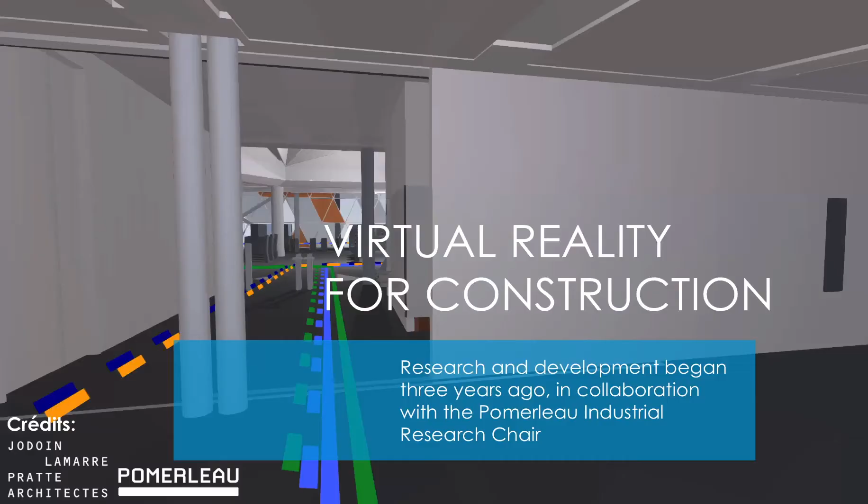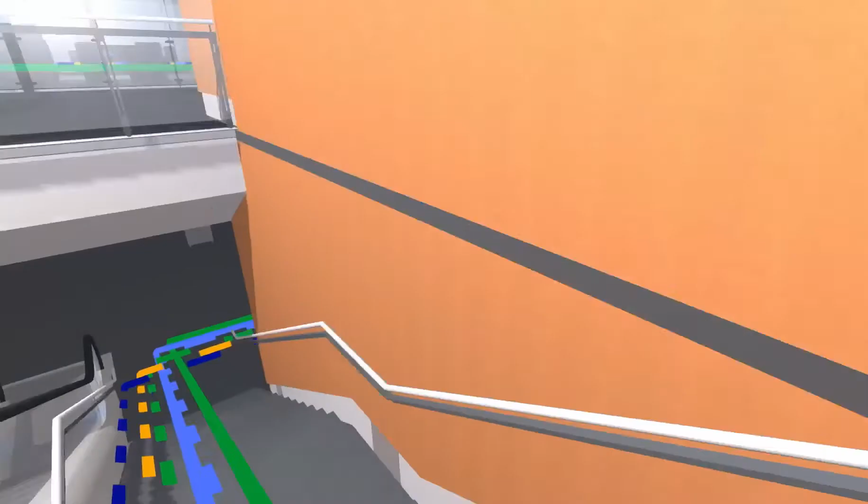There were 3 waves, if you will, of research, and it focused mostly on the use of this technology in the world of construction, so the needs in construction.

At the beginning, the idea was mostly to visualize and interact with the BIM models that we have at hand, while having an excellent graphic quality, and also to immerse ourselves into the project thanks to virtual reality with several different peripheral accessories.

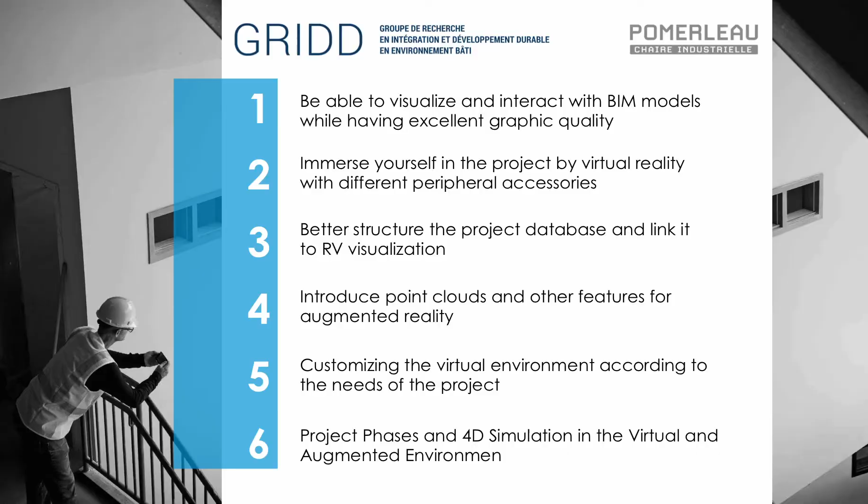In the course of some of our research, we've established that we wanted to better structure, better take into account the database with the visualization of virtual reality. We call upon several technologies.

Not only in virtual reality are we interested, but also point clouds that we want to take into account, and also augmented reality, as well as other functions that we will be speaking to you in a little while.

During the third research wave that Basil was part and parcel of, we sought to personalize the virtual environment according to the needs of the project, because each project is distinct and virtual reality is not applied in the same fashion or to the same degree for each project.

And then visualization of the deadlines, 4D simulation, and augmented virtual reality also comes into play in the pre-construction phase. So Basil is going to be explaining to you our different research axes.

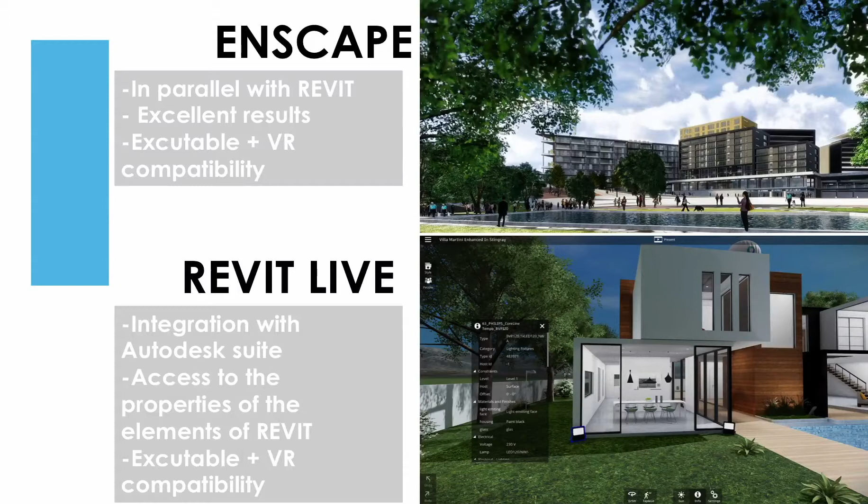For the visualization side of things, we went over the existing software. The four big ones: Enscape allows us to work alongside Revit with very realistic images, very practical, but it's only from a visualization point of view. Autodesk has the same principles, allowing for the same thing. There's also the Revizto tool that adds a collaborative aspect.

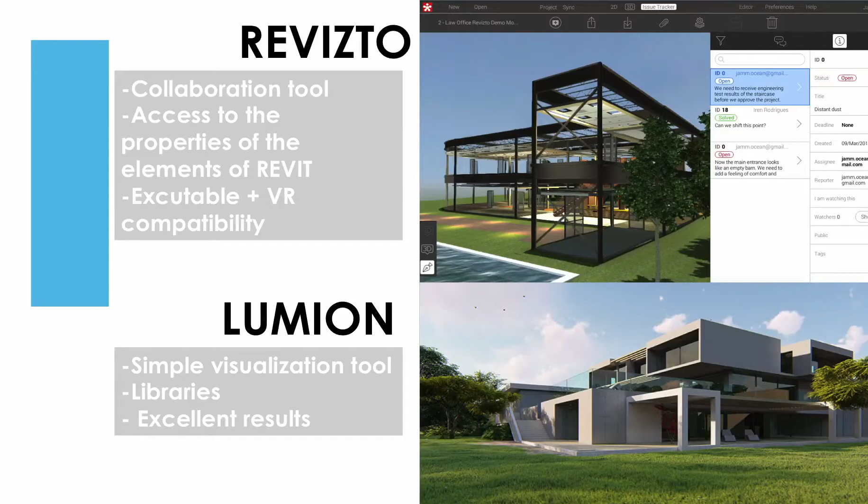Here, the idea is not for things to be only practical. You can add aspects like traffic, equipment, automobiles, trucks, what have you. All of those tools I've mentioned are very practical and perform well, but they're not flexible enough.

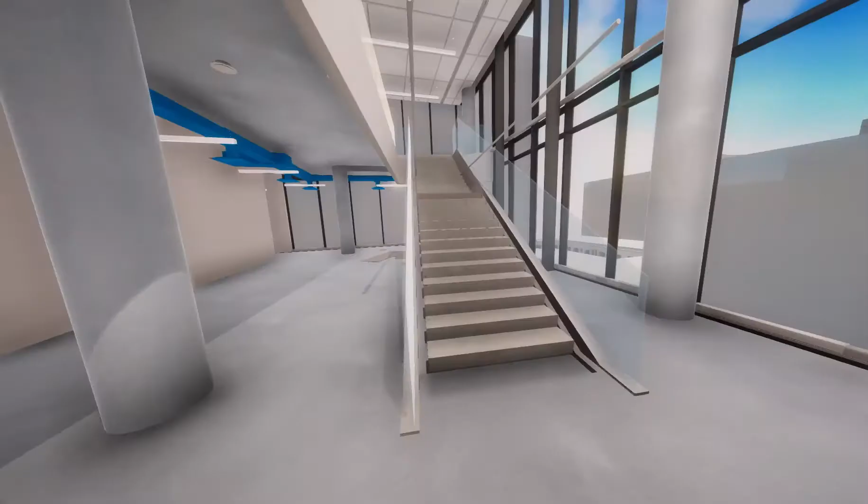We were looking for something useful at each phase of the project that could answer the needs of each specific client. So the next thing we did, which was appreciated by the teams on site, was to put the 2D projects into the virtual headset.

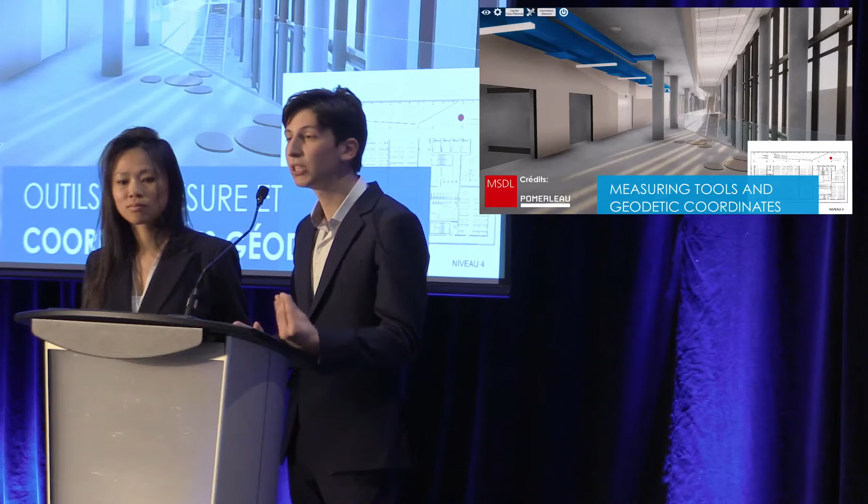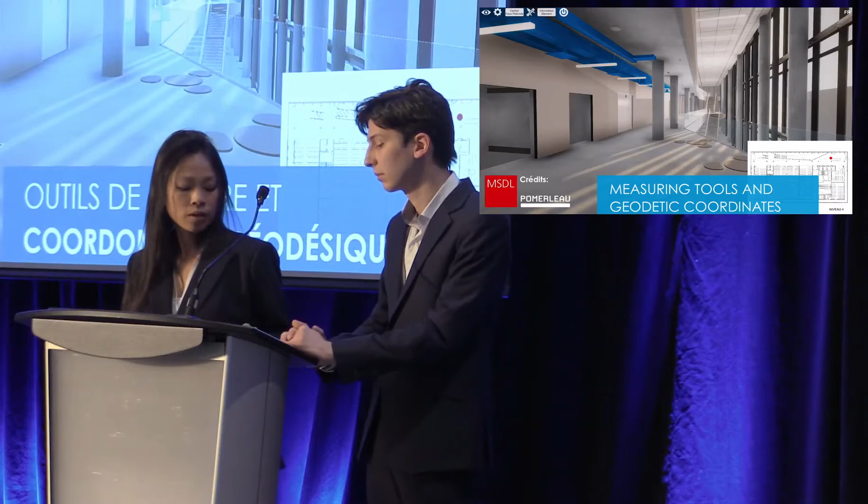In using the model, sometimes we realized it was frustrating to see certain elements but not all of them. We wanted to know the dimensions or the distance left between two elements, and it wasn't possible. But after working on it, the tool became very much in demand.

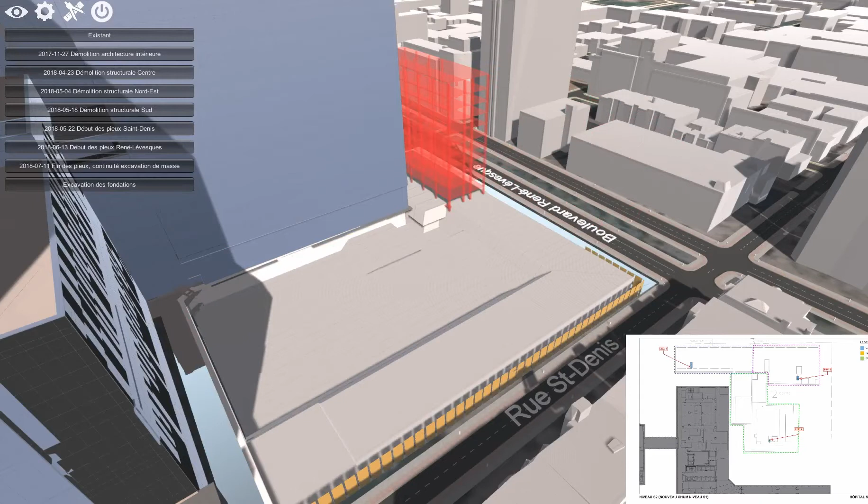Visualization of the deadlines, especially with the different phases. This is the CHUM project with visualization of the different sequences for demolition. This allowed us to optimize the demolition sequences and phases for our subcontractor, three times over, and to optimize the different deadlines or calendar.

This allowed us to suggest a revised calendar to make up for six weeks of tardiness. All of these details we were able to visualize, to better understand the complexity and the different interrelationships that one wouldn't necessarily see with another type of diagram, like a Gantt diagram.

Here's a visualization of the different phases of the project. Here we have the airport as a project, a broader picture of the transfer center. There are several types of passengers or travelers who go through here, different phases, different facilities, different types of constructions. Some travelers can't be found in the same place as others.

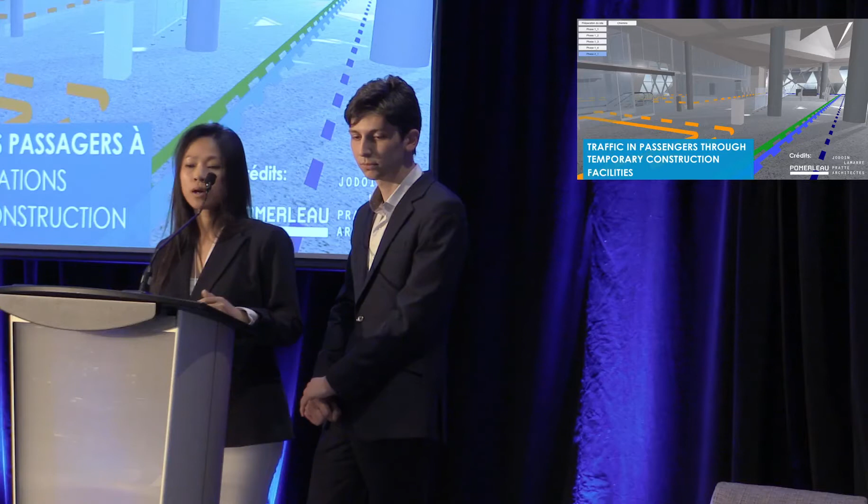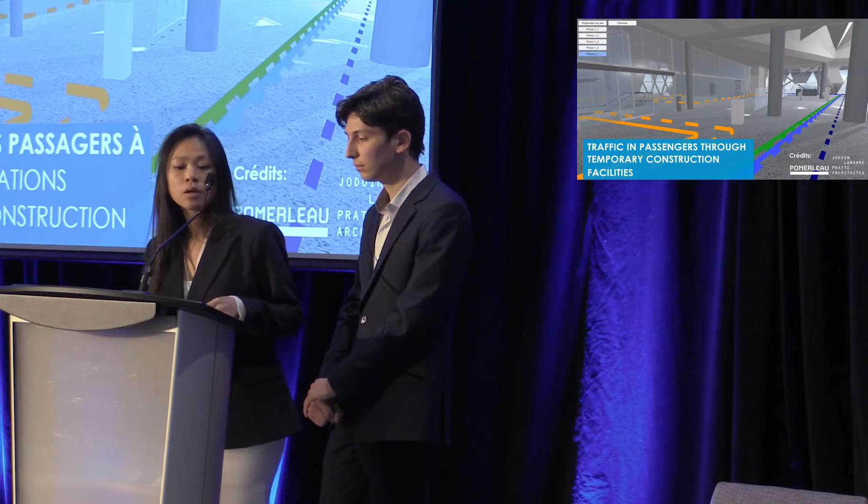This needs to be visual for the people working in the airports, but also for the client experience people. One has to understand where they're going to be positioned and for how long, and if there's too much traffic, what this will look like, if there will be zones that are overcrowded. It's a very useful tool to communicate the construction phases.

Another aspect was for the Hôpital Sainte-Justine, a children's hospital. The medical teams asked us to take into account the point of view of the children and the adults, those working there as well as the patients. So we installed highly specialized equipment, wanting to see if it was possible to adapt it specifically for children.

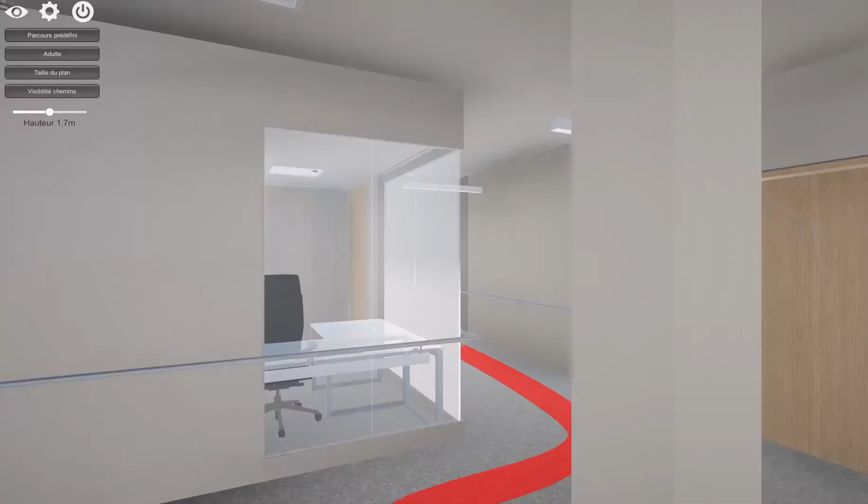Also on the sites, we're able to call upon virtual reality to review or re-examine a model with a predetermined path, so we don't forget critical sectors, and to go back on the same path several times with several stakeholders so everyone sees the same thing from a different point of view. It allows us to stick to our path.

So our research axis took into account point clouds for virtual reality or augmented reality. Here we have Parc Jean Drapeau, so augmented reality and not virtual. The point here is to use GPS to reference ourselves to the model and to superimpose it to what already exists with a webcam.

So in way of summary, there is software that exists for visualization, and those are great, but we want to adapt to the needs of every single client. So we needed to develop things further. It was indispensable, which is why we're focusing on our tools.

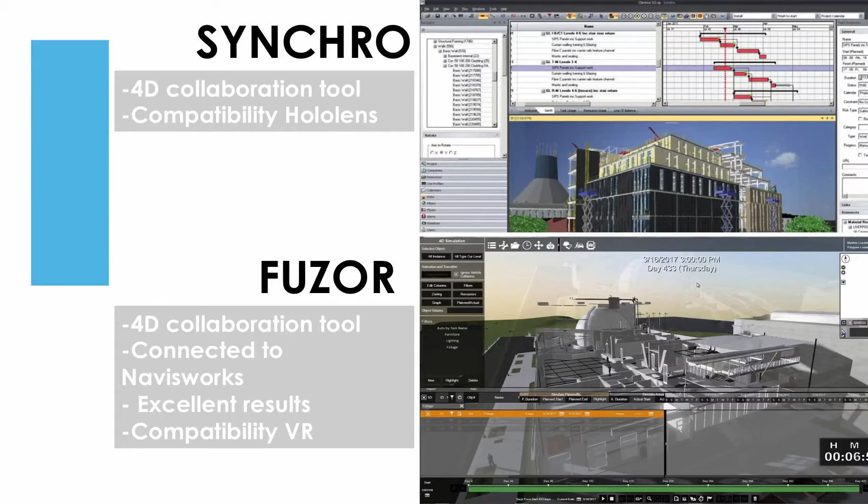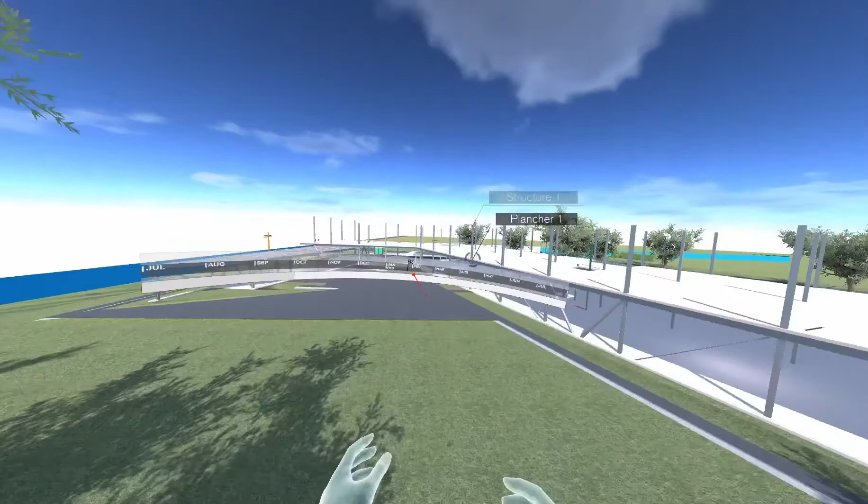The last axis would be a 4D simulation with 4D and the creation of such a tool. There's Synchro, Fuzor, which are very powerful softwares. The principle remains the same. We want to have our own method for creation. So this is the first goal that we've attained, to use Unity with the interactive features.

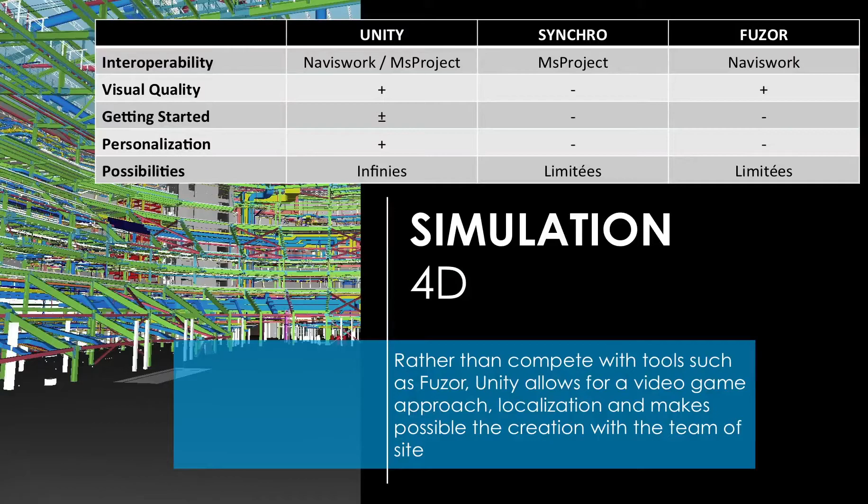The next point would be to create 4D simulation with the people on the site while making it fun and creative, calling upon what Unity already does with video games, but in such a way as to have our own creative system.

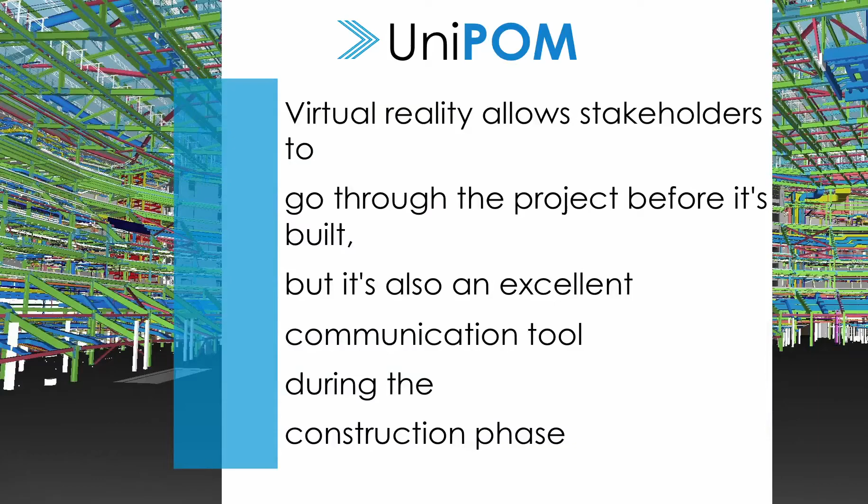So virtual reality does not allow only the possibility of seeing the finished project ahead of time, but it's also a good communication tool during the construction phase with our different stakeholders. And as well for our clients, communication of the temporary facilities, especially with already existing projects, was very beneficial. As well, in order to be able to communicate the design and the design challenges during the course of the meetings.

And we used it on the construction sites and when we were communicating with the subcontractors. And we also used it to confirm the positioning of specialized material with our final users or end users.

The example that we like to mention is the Baie-Saint-Paul Hospital, where we introduced virtual reality to the surgeons as well as the nurses in order to validate the position of specialized equipment, and as well in order to avoid changes on the site. And these changes were brought forth 6 times with the 3D model.

And it was a positive outcome. I don't have anything else to say. It was good.

Also, for the specialized equipment, mainly in maintenance or in the mechanical rooms, there's also use of specialized equipment. They're everywhere. So it's very good for the communication with our